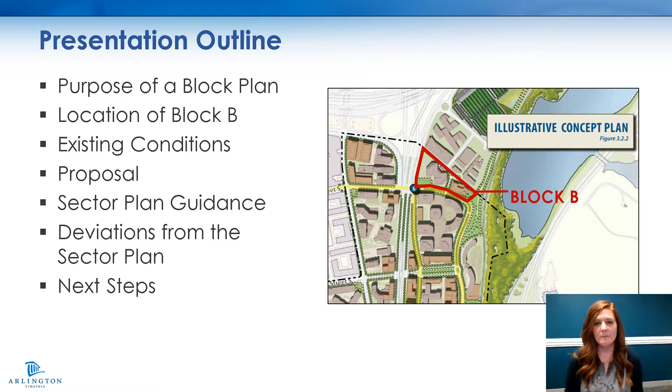This is the outline that we're going to be following for the presentation today. We're going to spend most of our time discussing the sector plan guidance for Block B and the deviations that JBG is proposing. We'll also touch on next steps, how you can submit your comments and questions, and what the process is going to be going forward.

So the purpose of a block plan is to ensure that Crystal City develops in a manner consistent with the sector plan, and that future planned improvements are not precluded by the proposed site plan project. We also want to ensure that the infrastructure is maintained during the course of redevelopment.

So a block plan is something that is unique to the Crystal City area. It is a long-range planning document that looks not only at the buildings but also at land use mix, tower coverage, open space, etc. A block plan is required in certain circumstances.

So if you are doing a site plan project in Crystal City that is east of Richmond Highway and is requesting a rezoning to CO Crystal City, then you're required to submit a block plan as well.

A block plan is finalized concurrently with a site plan project. So it'll go to Planning Commission and the County Board at the same time as the site plan project it's associated with. And if the County Board adopts the block plan, it is then finalized and taken as supplemental guidance to the Crystal City Sector Plan.

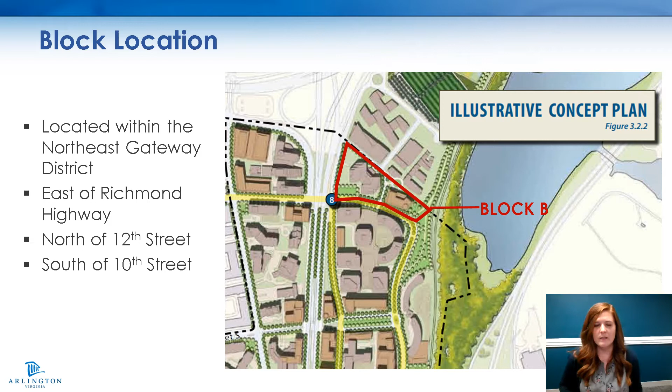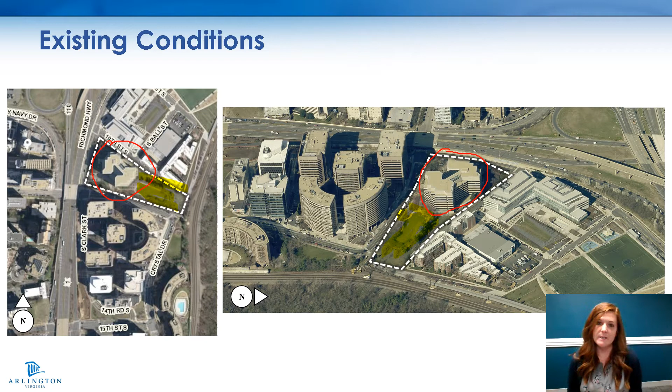The eastern portion of the site is currently a passive open space that is owned by JBG. There are currently no permanent structures on the site. There is a sidewalk loop and trees and benches there, but there is no public access easement.

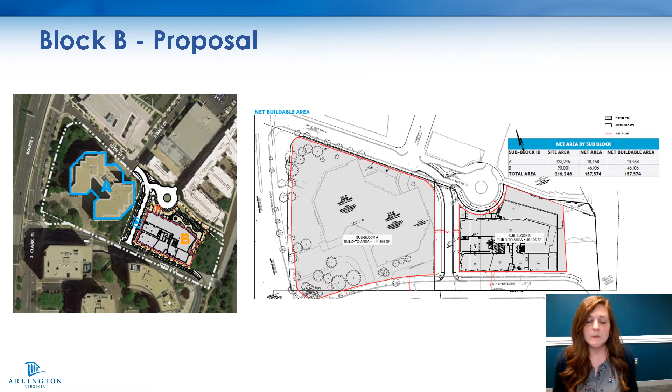So diving into the sector plan guidance, the next slides are going to show a series of images from the sector plan, and at the end we're going to go in depth on the deviations that JBG is proposing.

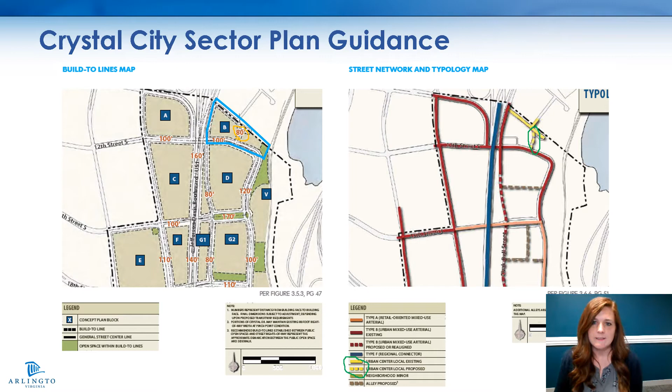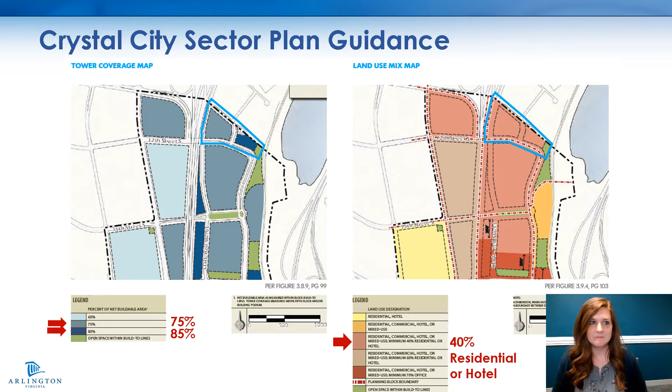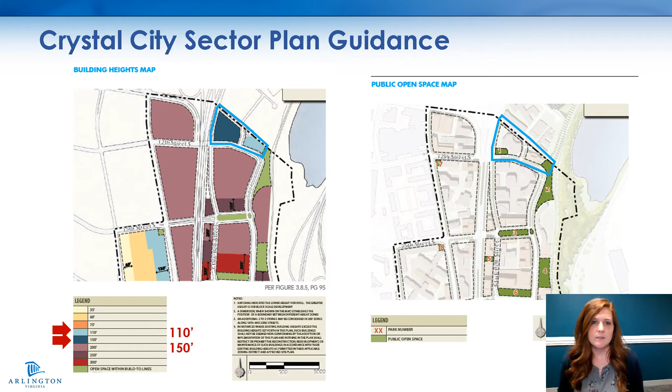The site plan project associated with this block plan is coming in at a 2.5 FAR, so there will be a community benefits package associated with the site plan.

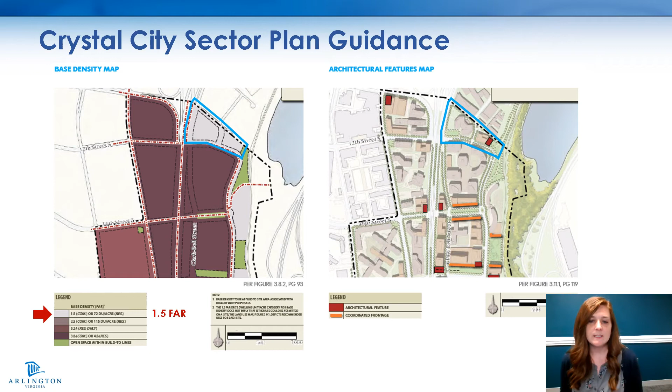On the right image, you can see that the eastern facade of the east building is called to be an architectural feature. These are some examples of architectural features in the sector plan, ranging from different facade materials to corner treatments, and they're meant to be given a little leeway to create a unique, cool design.

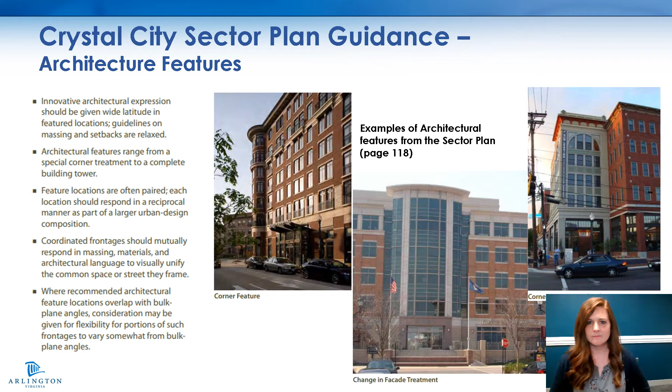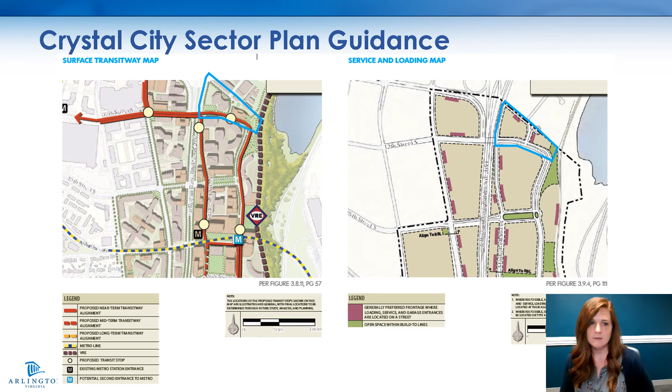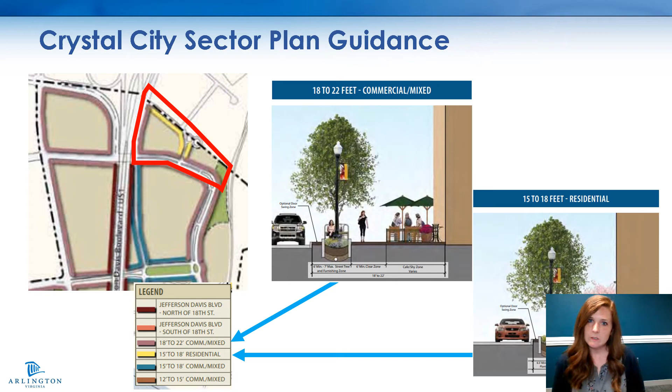Additionally, the sector plan has guidance for sidewalk widths on this block. The yellow shown goes from 10th Street and that new connector street, called to be 15 to 18 feet. The Long Bridge Drive sidewalk down 12th Street is called to be 18 feet to 22 feet.

The next three slides have a chart identifying different items called out in the sector plan and whether the applicant is proposing a deviation to those items. I'm not going to go over each one, but I'll let you look through them and give you time to pause and review further if you want.

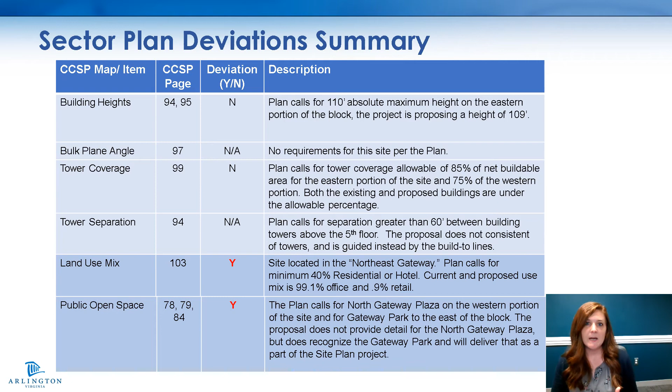Here's the second chart, and this is the end of the chart.

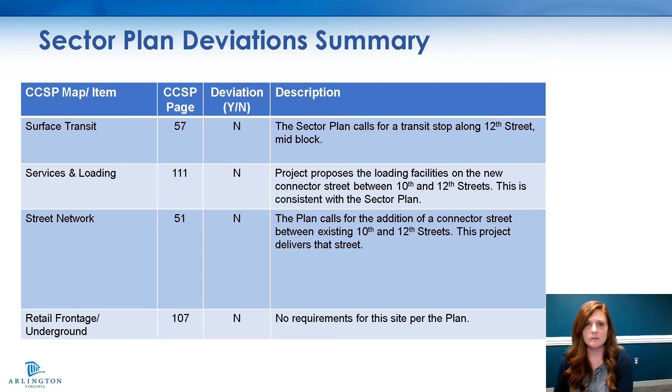Starting with the first deviation, the sector plan calls for this new roadway between the two buildings, the 10th Street connector, to be 80 feet in width. The applicant is proposing to have it narrower, about 65 feet, so that is a deviation they are proposing.

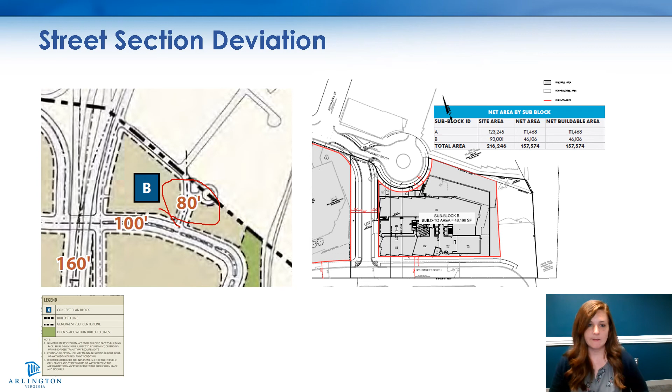A second deviation is to the land use mix. The plan calls for a minimum of 40% residential or hotel on this block, and the applicant is proposing 100% commercial, about 99% office and 1% retail.

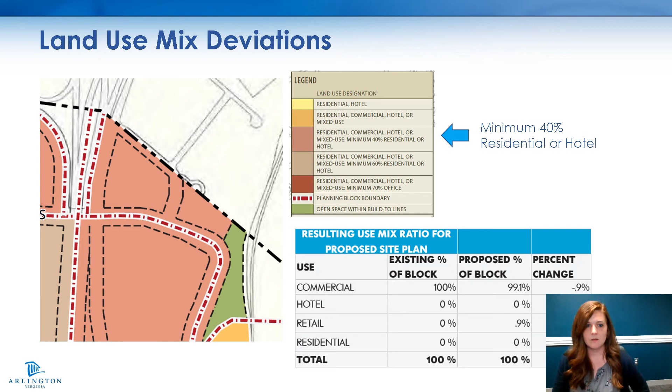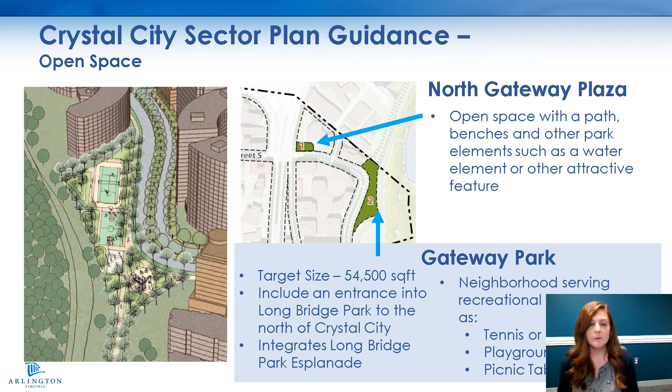The last proposed deviation is to the open space on Long Bridge Drive and 12th Street, labeled number one here as North Gateway Plaza. The sector plan calls for this to be an open space with a path, benches, and possibly other park elements such as a water element or attractive feature. Right now the applicant does not include that in their block plan, so it's being shown as a deviation.